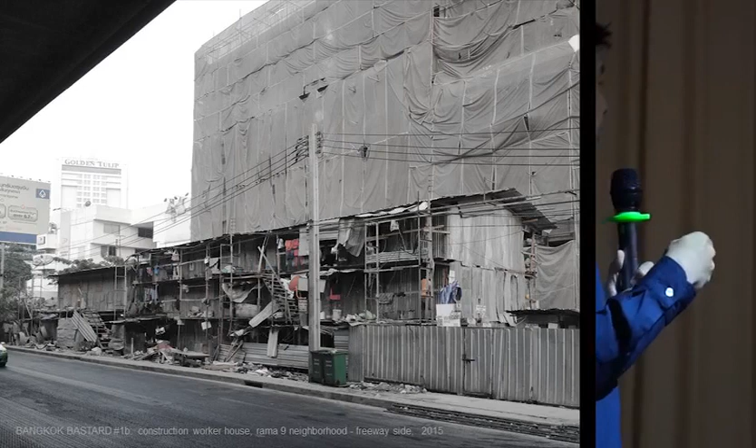I find this building type to be extremely inspiring in terms of the life that you see, the kind of authentic nature of these buildings and the way they're built. And as you know, they're built by the people who live inside the houses themselves, the construction workers. I feel like there are lessons to be learned with these very homegrown architectures that we can bring to our table to create a more authentic and locally sensitive architecture. Even though they're smelly, dirty, and messy, that's not the point. If we dig in deeper into them, you'll find there's so much more knowledge that's embedded within them.

So I started to give these Bangkok bastards, on top of photographing them, their due respect. I started to analyze them, measure them, document them.

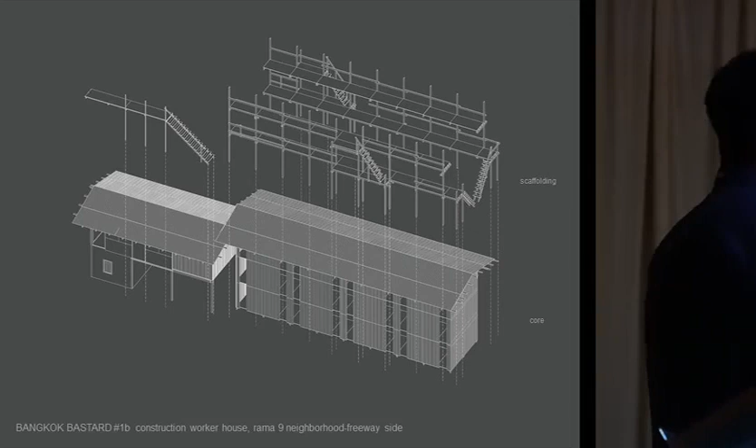For example, this construction worker house, if you break it down, just consists of a core unit—very small rooms that are tight, hot, and uncomfortable. But the fact that they're small and cramped forces the people who live in them to build scaffolding. There's usually a circulation framework that wraps around and becomes a veranda, shaded from sun and rain, that becomes a space for eating, drinking, playing cards, napping, fighting, arguing, doing laundry. It becomes a kind of scaffolding for life.

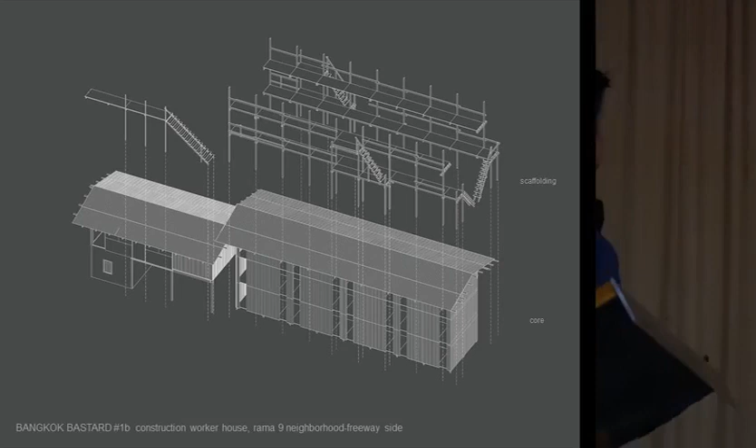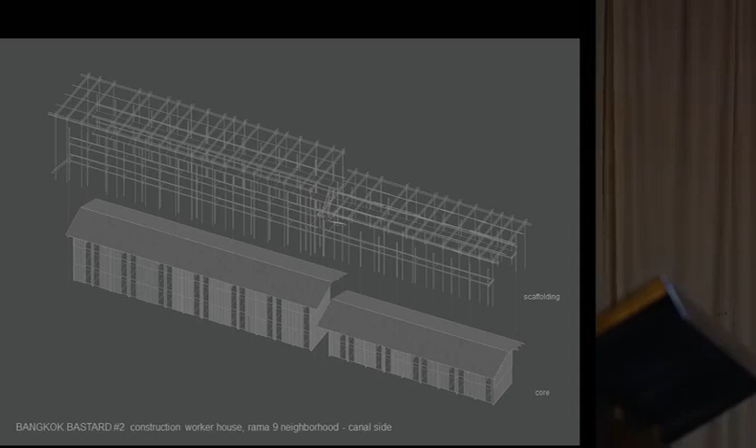Once you get to know this type of architecture better—this is another construction worker house on the same site as the first one, but this one faces the Klong, or canal, in the back. You can see the scaffolding has been transformed, not only as a veranda but also a canopy to protect the house from falling debris. So the workers have hybridized the scaffolding to become a protective helmet on top.

This beautiful one—when I went on site, the builder, the contractor, ran out and said, 'What are you doing? Are you photographing this? This is my baby. I'm gonna have it copyrighted, so please don't reproduce it,' because he was very proud of this one. And I think it's beautiful. I said, 'You should, because it's great.'

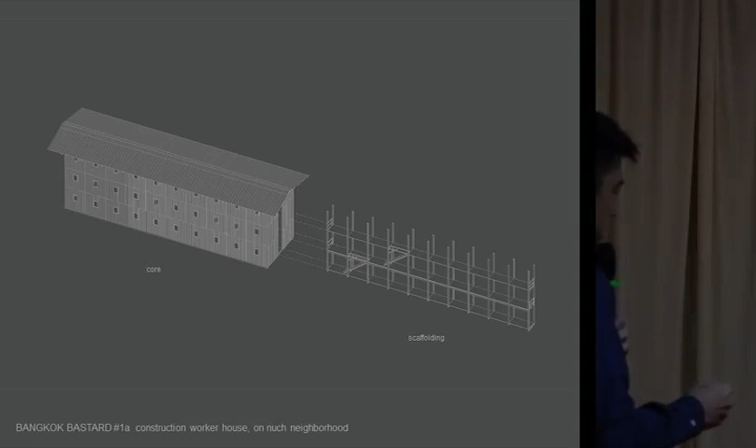But this one is different. This one has rooms on the outside, and the scaffolding is actually a double-loaded corridor. People come out and work in this kind of wind tunnel, and eat and cook and all that in this particular space. So you see how the scaffolding gets manipulated and changed.

So this modular unit can become multiplied and becomes housing units. You really redefine what a wall is and what a door is, so you kind of unbutton your door to go inside.

And because the workers and a lot of local Thai people don't have furniture, they sit on the floor—you can just peel up the window and let the light come in. So these are the lessons that I learned from these beautiful bastards, which I call them.

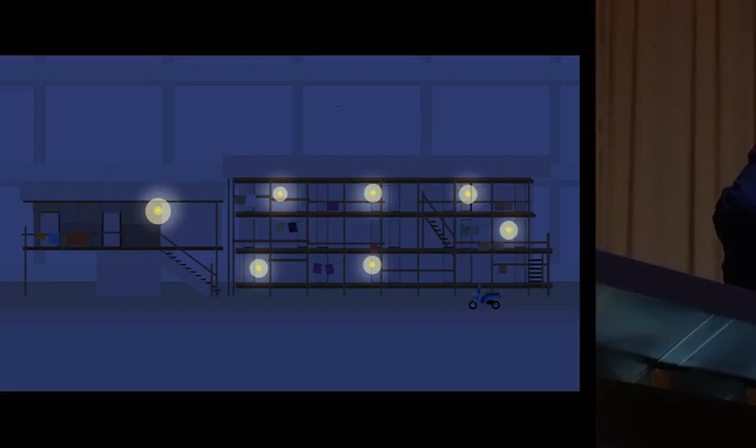And because I talk to a lot of students and young people, there's an epidemic right now, and I think it's brought on by modern architecture that really comes from the West—that you have to do a spectacular elevation, you have to do spectacular forms. And I think that comes about because we're always taught to look at architecture as a two-dimensional image. We forget to think about life and time scale, how a really simple structure can actually look mundane and regular on paper, but can actually accommodate life.

So I had to think of a new way to represent architecture that would show that. I did an animation with a local Thai funk band providing the music. So I'll let you see for yourself. Go ahead—this is 24 hours in the day of a construction worker house.

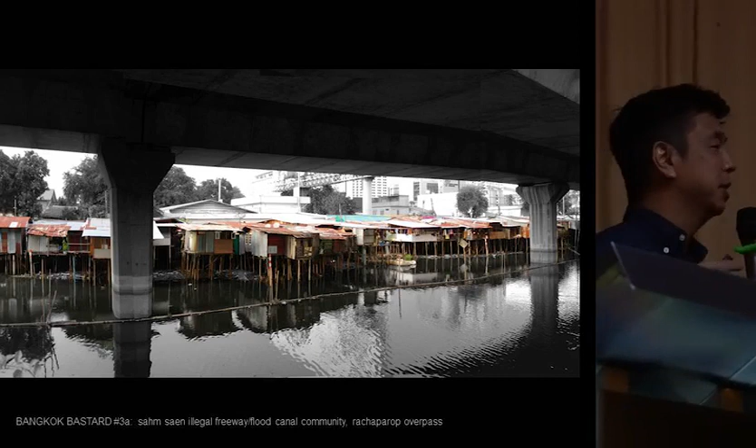So this next project is called the Sahm Saen Flood Canal Community. It's actually a semi-legal shanty town that's built on top of a flood canal, but also topped by a freeway. So it's this community that's tucked within infrastructure in Bangkok.

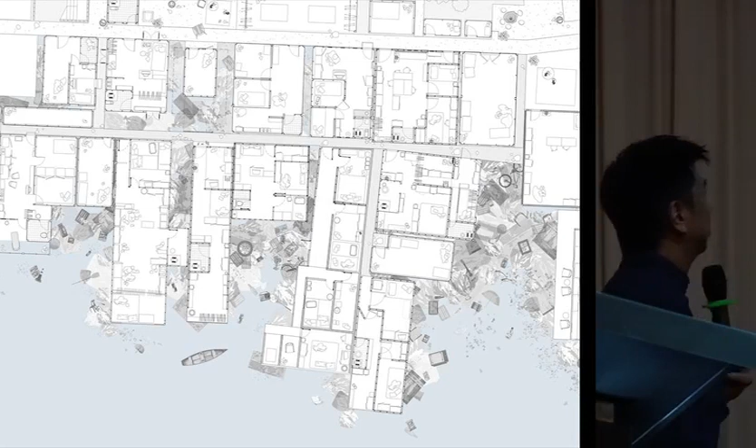So on top of diagramming them, this time we actually went in and really wanted to study in detail the architecture. Sorry, there's an image that's not showing. That's okay. Yes, okay.

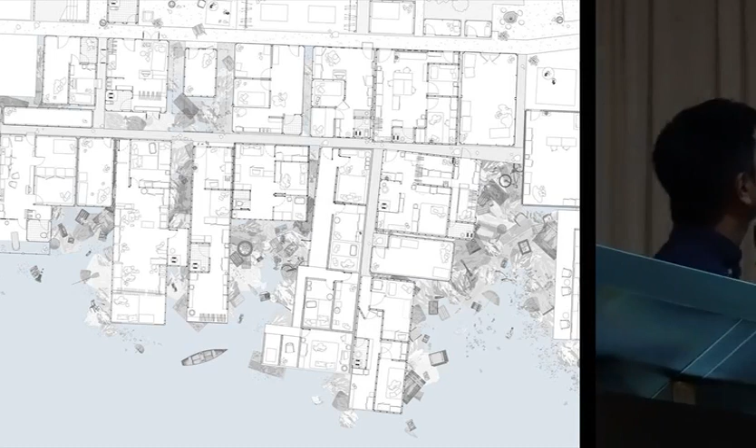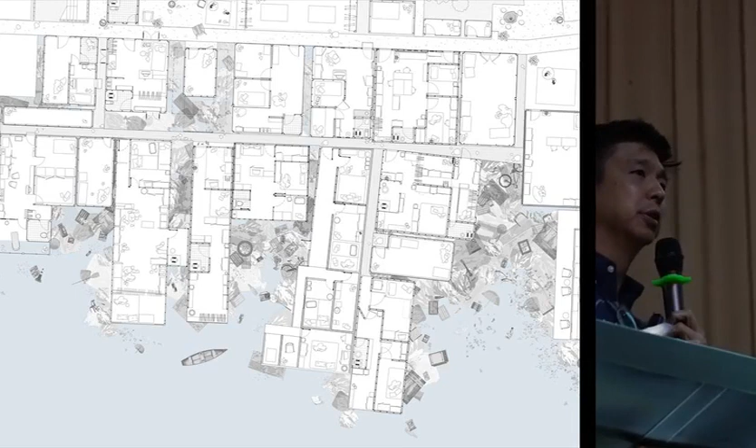So our team, consisting of both architects as well as student interns, go in and measure not only the walls and the doors and the windows, but also the pillows, the benches, the potted plants, even the garbage in the water, which I feel are all these little components, especially in Southeast Asia, that craft space. It isn't just walls, it isn't just architectural components that we learn in school, but all these minor elements make an impact on creating space.

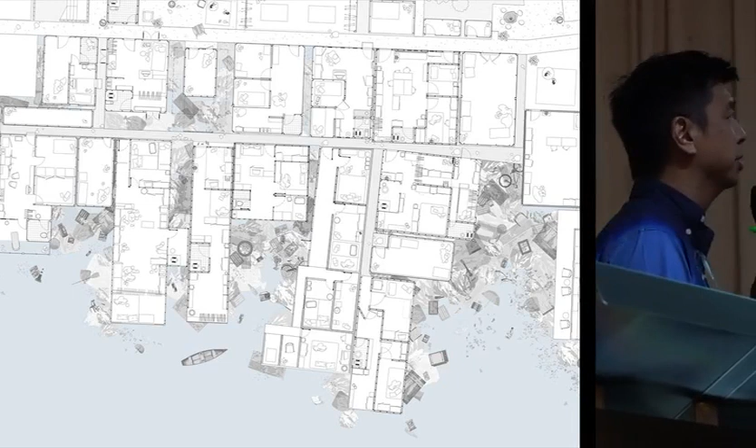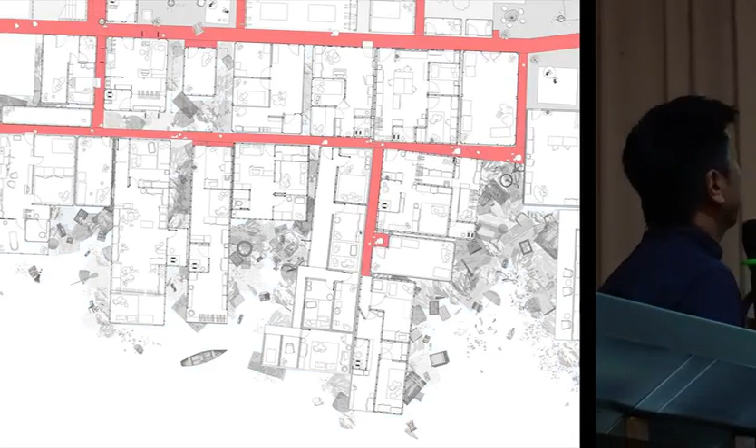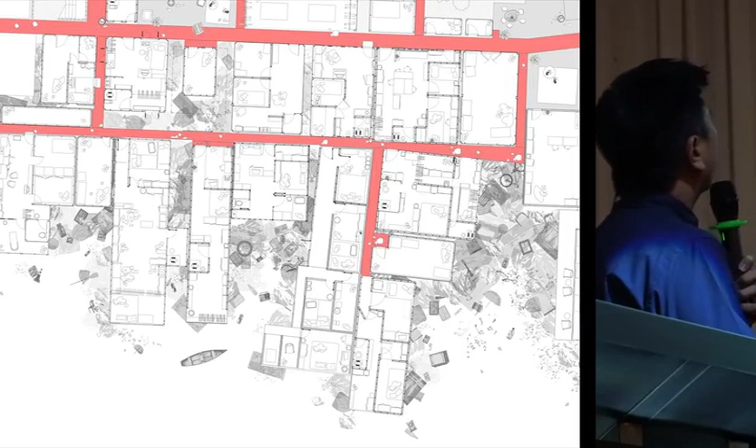And I needed to draw in a way that conveyed that as well, and to teach myself. And the deeper you get into it, you start to realize the organic growth and urbanism that happens. For example, these small little alleyways that are circulation spaces become outdoor living rooms. Similar to the construction worker house, where the small cramped rooms are very hot, so they're forced to come out and live on the paths, on the construction, on the circulation paths and the pathways, and they become public spaces where people meet and talk and eat.

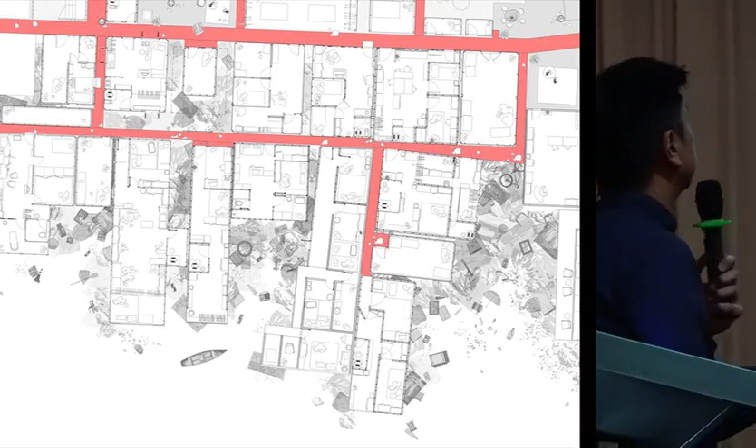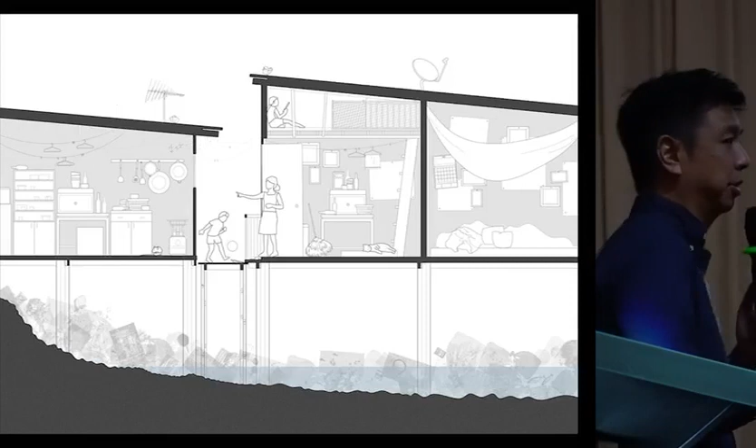Pots and pans and butane containers, cats, hangers, garbage, they're all architecture. They tell a story. So this little space is very significant in this community, right? And photographing it helps me understand it, but drawing it, measuring it, and talking to people makes me understand it much more in a way that I can use it in design in a meaningful way, where it's not superficial.

That's why I think research is very important for us to really look all around us and really record and analyze the things that are around us, rather than going on the website and looking at spectacular buildings on Dezeen or Architizer. There's so much inspiration all around you.

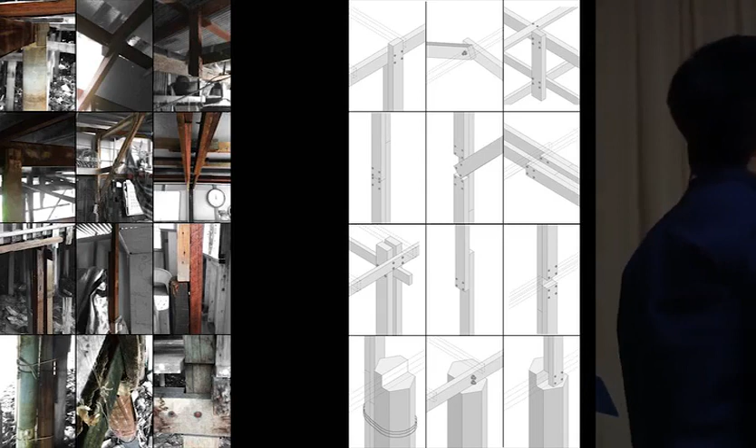To the point where we look at the tectonics and the construction techniques of these shanty towns as well, to see how leftover wood and lumber and steel members, even old telephone poles, can be hacked and transformed into new tectonics. This one that the shantytown uses, I call face joints, where it's the opposite of Japanese joinery, where you make mortise and tenon very carefully fitted to one another.

They're slapped, the faces are slapped on top of each other, and they just nail them in, because in another 3 months they may have to reconstruct everything or pull everything apart because the cops may come or the floods may come. So it's a very immediate, temporal type of architecture that I think we can learn from.

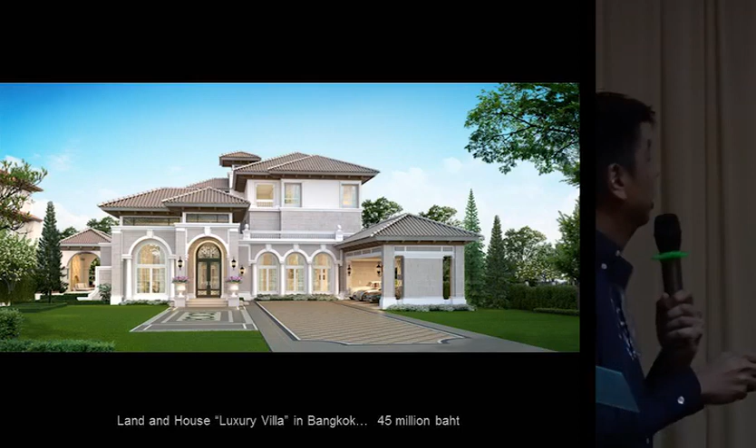And so I wanted to make a contrast between what I saw in the life that is conveyed in structures like this compared to what the dream is for a middle-income person in Thailand or Southeast Asia right now. The sign of success is to buy a typical developer home with a detached home with your surrounding garden, right? So this has been the dream, and it's been very much influenced by the West.

By doing the detached home, bringing it across the ocean into our country, because we have, in Thailand at least, a lack of zoning, where this house could be next to a busy street, we have to erect this 2 to 3 meter high concrete block wall, blank, that kills street life. So one of my first projects, I tried to identify how we could create a new type of perimeter wall suburban house that actually brings life back to the street.

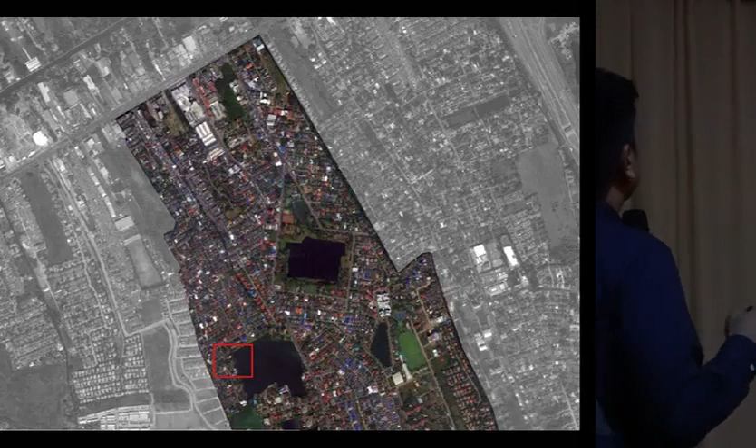So this is a project called Sala Arya. It's a yoga school slash house, private residence. And it's in this very funky neighborhood. It's quote unquote a gated community with a lot of detached dwellings.

But for some reason, as things in Thailand always happen, the law becomes ignored a little bit. So rather than all residential, little programs like wedding salons, convenience stores, spas, cafes, cuckoo clock shops, pubs and restaurants start to creep in. But in the end, it makes for a great mixed-use community.

And the client, a friend of mine, is a yoga instructor who lives in a rental home in the same community right now. Her house is a little bit too small to cram in all the yoga students, who are actually housewives or members of that community who walk to her house to learn yoga.

Another component is the client's mother, who has Parkinson's disease and is kind of confined to a wheelchair. But the great story is that whenever there's a yoga studio, mom comes, is ripped from her iPad watching Thai soap operas, and is willing to come and exercise with the class, so it always helps.

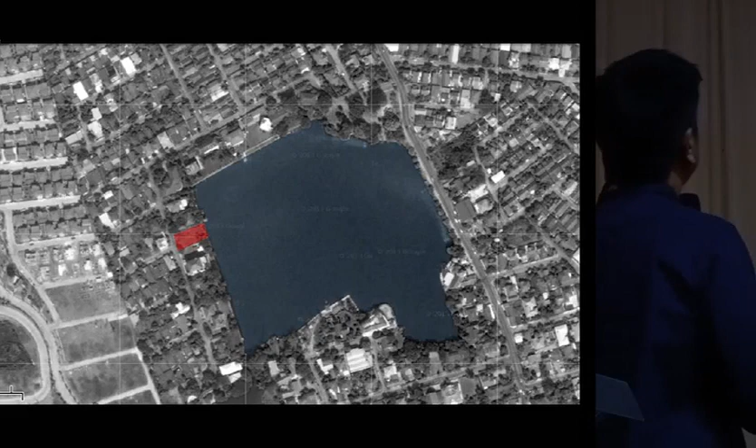So this house, the plot, is right next to this kind of flood reservoir. So it's an important connection between the street and the nature and the water. The house itself, or the house/school, is organized in a kind of unique way.

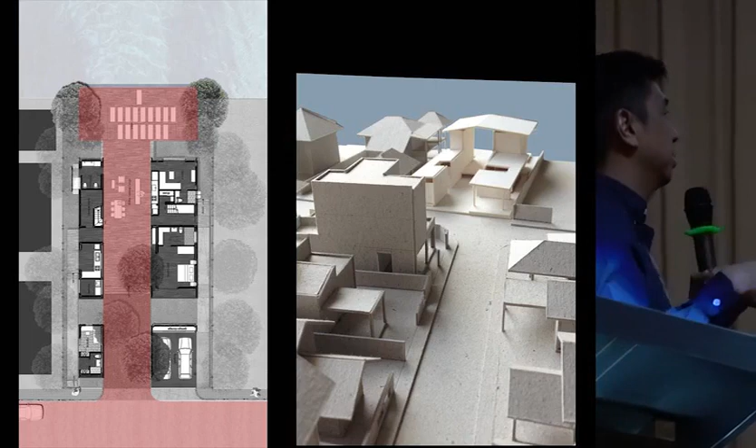It takes the lesson of the soi, or the path, as the main protagonist of the architecture. So the house itself isn't just the volume or the architecture itself. It's actually a small alley that pulls the community into the heart of the house and to the water. This space becomes kind of an informal open-air multi-purpose space, which you'll see.

I'll show you. So this is a model where these two volumes kind of define this gap in the house and lead you to the water. And at the end, these two volumes, their heads shoot up to become the master bedroom and the guest bedroom.

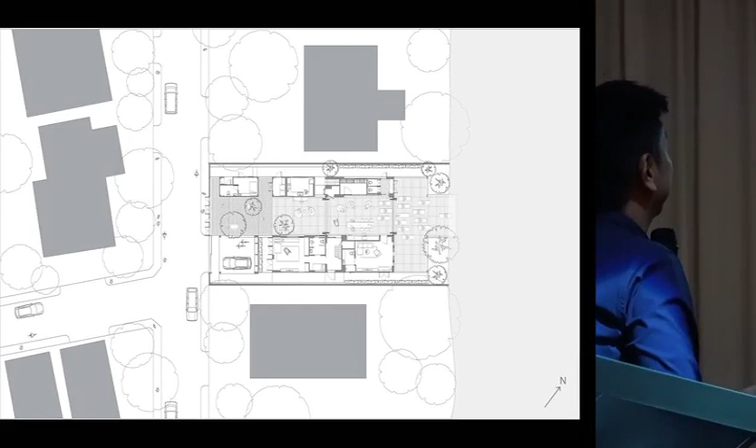So in plan, you can see how the house is actually, when the gates are thrown open, becomes an extension of the street and becomes an extension of the neighborhood, where the yoga students can come in and practice in this central space.

And in section, the central space is a void, and it's only covered by a large roof. Depending on the time of day, for example in the morning, when the sun is coming in from the water, the students practice yoga on this side of the court so that the roof throws a shadow onto the yoga area. In the afternoon, when the sun is coming from the front of the house, the yoga students move to the water so that the roof blocks the sun. And during the rain, they can just move indoors where it's covered.

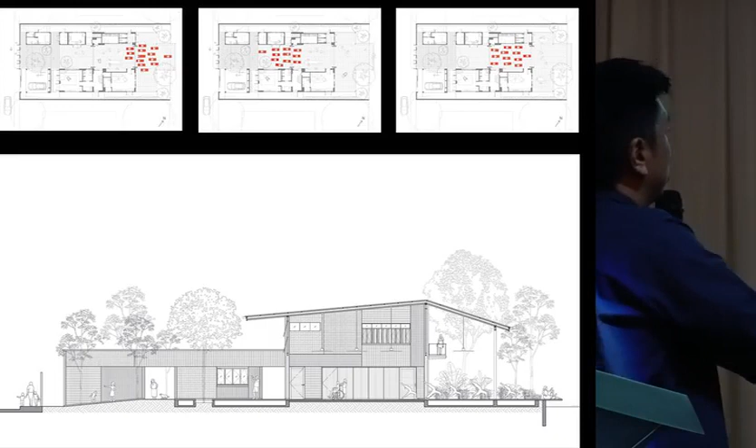The material is very important, and I'll go into it briefly later. I call it a bastard tile brick material that we invented for this project, that becomes a lining on the street wall and then pulls you in into the house as a lining.

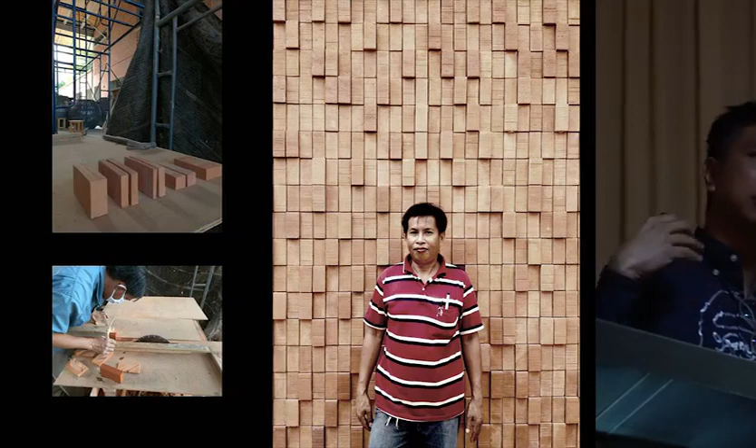And I think it's important. You may not understand it, but I feel like expressing it is important, so that there's an inherent, sometimes hidden DNA in architecture that can carry your memory of the place, even though sometimes it's hybrid.

Oh, and also, I have to tell you about another funny story. In Thailand, we always have to deal with catastrophes that are not expected during construction. I'm sure that happens here. There's always unexpected things that happen.

For example, these bricks, these local simple bricks that we ordered, were supposed to be about 12 centimeters long. And when we paid the deposit and half of the shipment came to our house, they wound up to be about 9.5 centimeters long. And I asked the brick supplier, what happened with the bricks? And he said, oh, a little bit of shrinking. I said, shrinking? How can a brick shrink 3 centimeters? And that was the end of that.

We already paid our deposit, so we're left with the dilemma of these smaller bricks. When you have smaller bricks, you can't cover the whole wall if they're shorter by 25%. It means we were missing bricks with the money we already paid. And so I said, oh my gosh, I don't want to go over budget.

What do we do? I always work with the craftsman and the contractor, and this is our craftsman, Chang Nu. Chang Nu said, oh, Khun Chat, don't worry, I have a solution. I'm gonna chop your brick in half. You see, I chop it like an iPhone right here, then I chop it like a popsicle here, okay?

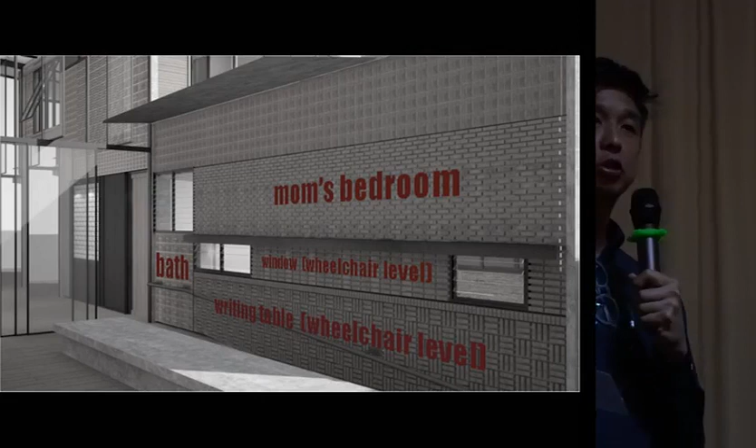In doing that, it allows us to create a new language, right? We're able to create these patterns that are completely two-dimensional and superficial, not load-bearing. So I feel like it's very Thai, because Thais are very superficial in the most positive way.

And with the superficiality, it doesn't mean that it's not meaningful. Each pattern conveys parts of the interiors truthfully. For example, this is a mom's bedroom, so this pattern conveys the writing table at the wheelchair level. This is the bathroom. This is the window zone, right? So these patterns, the mistakes that we had to solve, create a new language so that we could create a new local Thai bastard architecture.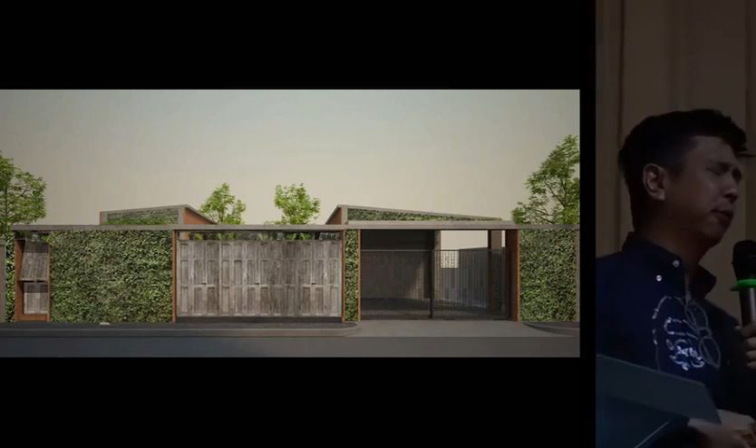So that was the wall we just saw. And again, the interface with the street is very important - how the perimeter wall house doesn't block itself from the street all the time.

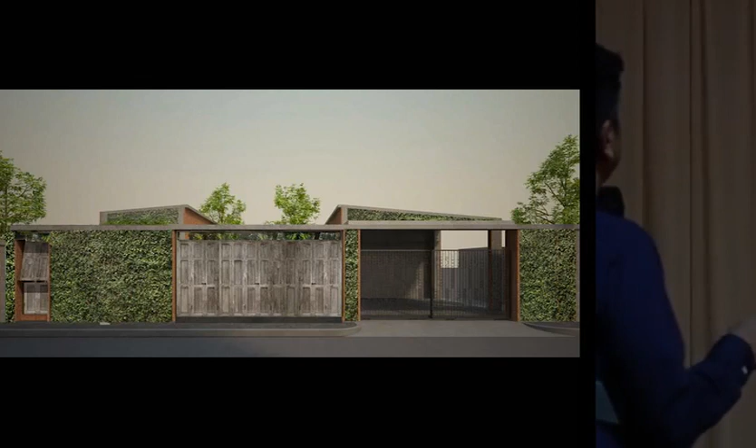This is a computer rendering. We bought these old doors, salvaged them from an old Thai house in Chiang Mai, northern Thailand, and it can be thrown open so that the house opens up to the community. This was taken just last month.

Our builders went further because we had leftover tile bricks. Remember the popsicle sticks? He chopped them again into quarters, almost like ice cubes, and said, 'Oh, this is my ice cube wall for you.' It's beautiful. Then he recombined some other bricks and said, 'Oh, I want to make a new type of CMU.' I said, 'What?' So the bricks he had, he remortared them into blocks and stacked them in a new way.

I feel like invention doesn't have to come at the studio desk - it could happen on site. And so for me, this little alley and our own alley aren't so different from one another, right? So this is where research starts to inform design and vice versa.

I'll go through this very quickly. Am I doing okay on time? Yeah, okay. So I'm gonna do a quick pass at a hotel we finished about 7 years ago to introduce you to another hotel.

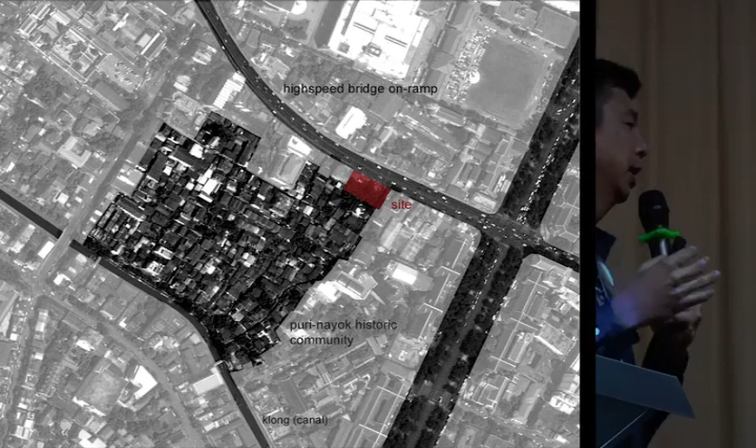This is the Nanda Heritage Hotel, a 3-star hotel that the client asked us to do as a boutique hotel at that time. I shot back and said, I don't know what a boutique hotel is - people use that word all the time. But what I do know is that a good hotel makes you feel the spirit of the place. It brings out the local character of that place.

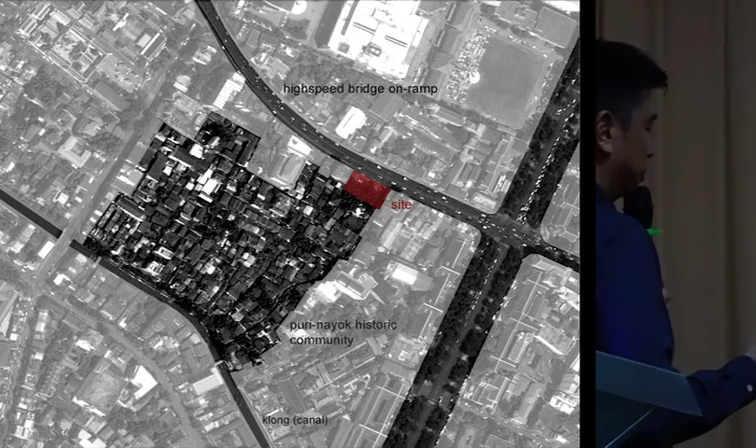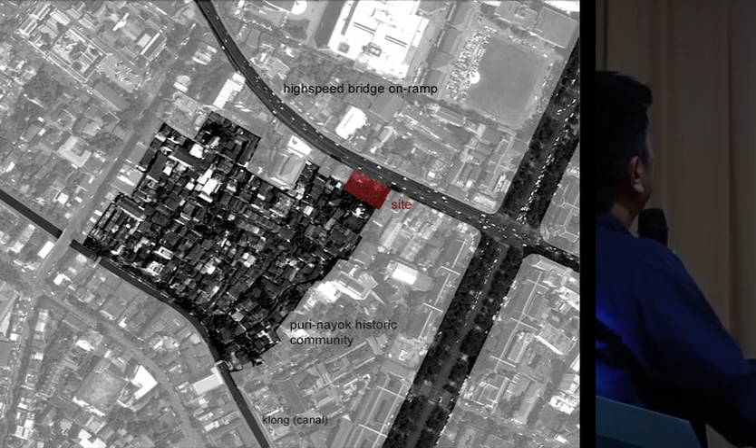This site is really interesting because it's at the connection between the new city and the old city. The site is like a knuckle between this very high-speed, almost freeway-like street that leads to a bridge across the river. But in the back, it's a 100-year-old shanty town - shanty towns that most Thais don't walk into because they think they're slums, but there's very much beauty in there.

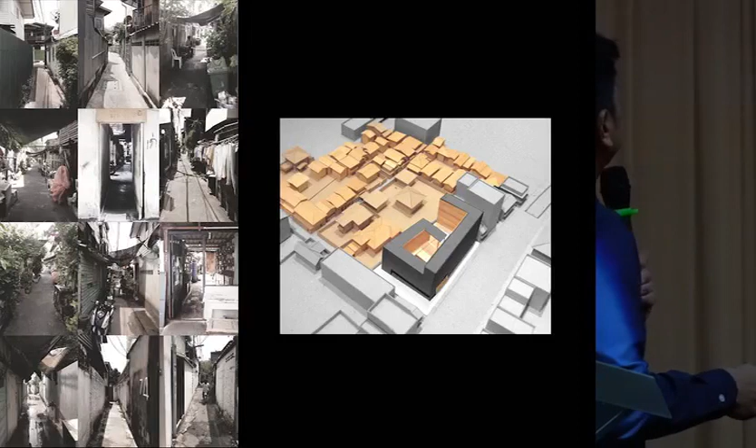So we built this model. We never built a model of the project itself - we always built the context. So we built the shanty town in back, and this is the street in front.

The shanty town, again, is full of these wonderful paths, almost like a labyrinth. You see that they use scavenged materials, old tarp, old siding, to create public spaces in the in-between spaces. As you can see in this model, we built the shanty town in wood, but also lined the courtyard of the building in wood. So the building itself is actually a shell where the living units protect this inner secret court that you access through a tunnel.

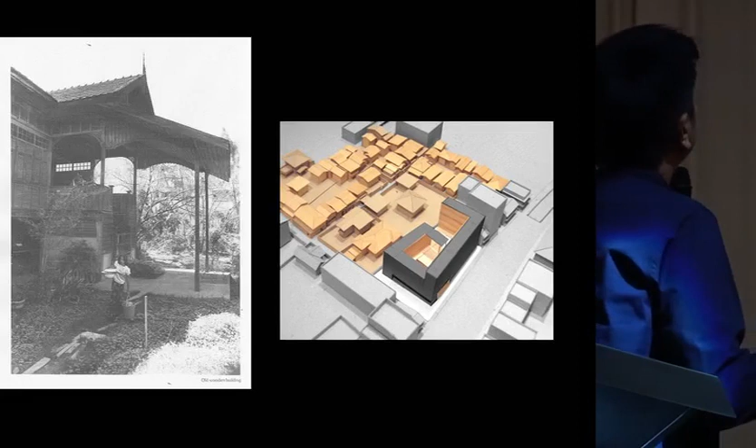Having learned the lessons from the locals, we try to reuse everything and create a sense of memory. During design development, the owner came to us and said, 'Chat, we have this old house that I grew up in - it's my childhood home.' It's a beautiful, 95-year-old teak wood house in Bangkok. He said he was going to sell this to get money to put into the hotel, and I said, no, don't sell it - let me have your house. Because I want to reuse it to tell the story of this hotel that's going to be called the Nanda Heritage Hotel, informing us of the heritage of the family.

So we went and surveyed the house, every single piece - ventilation panels, doors and windows, floorboards, railings, everything. We used everything and recombined it into a new core and inserted it into the courtyard.

So as you see here, the building is a bastard in that it does many things. The dark, simple concrete frame portion is 7 stories high in the front. It acts almost like a billboard with these speed lines inspired by the telephone wires, creating a big presence on the street so that when you're zooming down fast in a car, the building gets your attention.

But at the same time, the recycled wood is used to create a smaller building within the bigger building that operates at the pedestrian scale.

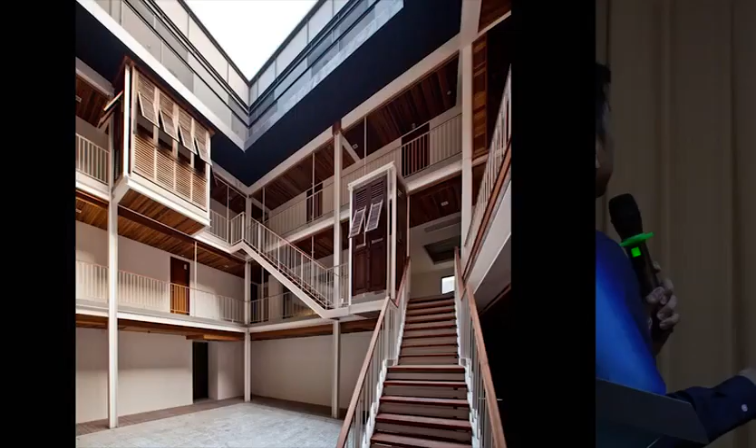So as you go through, you can see all the wooden elements from the house are reframed as artifacts in these slim steel panels, steel plate.

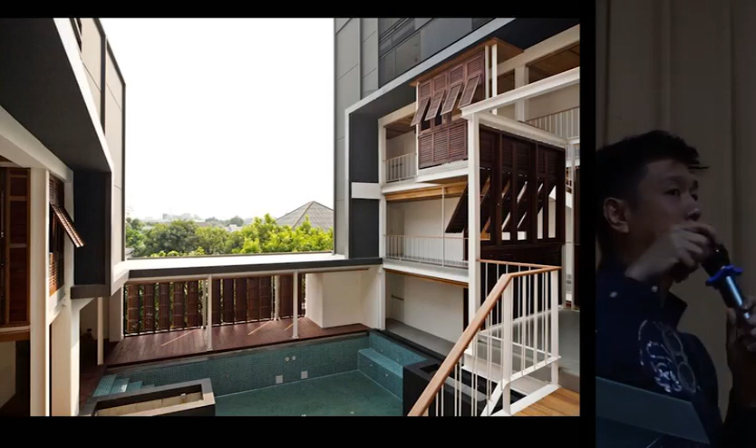And at a certain point in the courtyard, in the back as well, the building dips down to two levels, and I tried to frame the shantytown in back, as well as the neighbor's mango tree garden, so that even though you're inside the hotel courtyard, you're aware that you're part of the bigger picture, part of the shantytown.

And so we not only work on the programming of the hotel itself, how it can be a place for community. For example, almost every two weeks there's an event inside the courtyard of the hotel. This one was done in 2017, where a lot of Thai friends, designers, would get together and show projects to each other.

Of failed and canceled projects where the customers cheated us. Just kidding. No, which is about 90% of all our work.

But the interesting thing is, while we were doing this slideshow, the guests would pull up a chair on the balconies and participate and look, so that the hotel isn't just about tourists, it's about where locals and tourists meet as a community.

So this project is usually longer, but I wanted to preface it to a new project that we're doing. While I was working on this project, which took a very long time because there were various political and natural disasters that happened at that time.

While I was visiting the job site, thinking I was pretty special in creating this building with a tunnel, a pinched opening to create the secret courtyard, I found not too far down the street another building with a tunnel. And then a little bit further down, another building with a tunnel. And then another building. And then I discovered what my next research was: the Curtain Sex Motel.

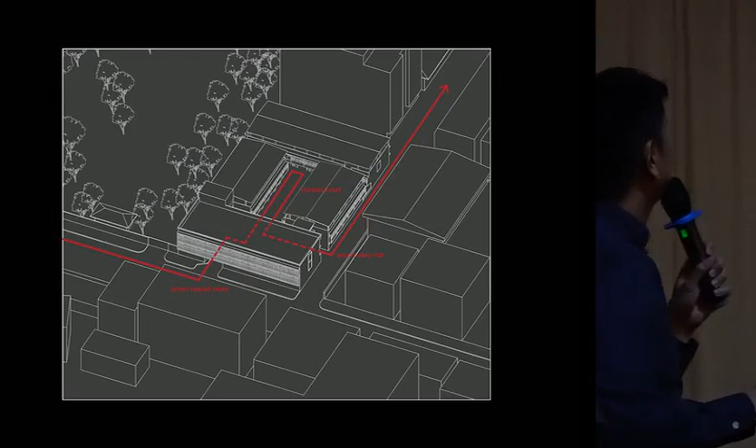And so I diagrammed it, right? So you go through here, you do your thing, and then you go out that way.

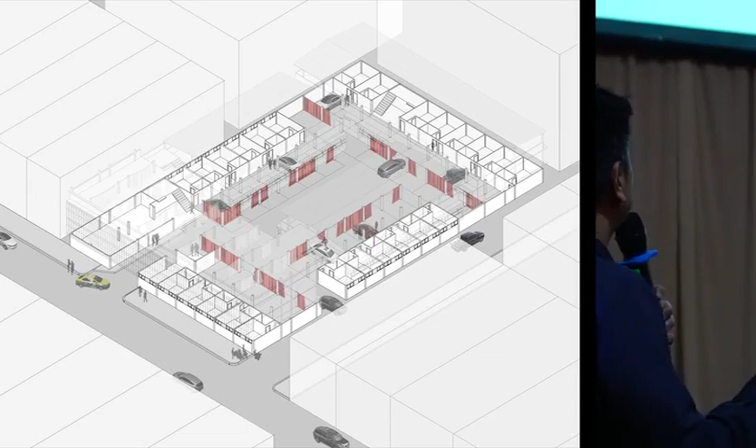And then we want to revisit it more, so these are drawings we just did for a magazine just last month, to really convey this space on the ground level where you go in and these red curtains really did shape and define space. And then we had fun with this section. You can zoom in on it on our website later. There are a lot of situations going on in there.

I did an animation, which is kind of X-rated, that we showed in China, and the police came and shut it down.

Do we have time to show it? I knew what the answer was anyway, I just asked to be polite. Okay, let's show it.

Wow. It tells a story of this pathetic man who tells his wife that he's going to exercise. He doesn't go in his car, he walks there, so he's a modern man.

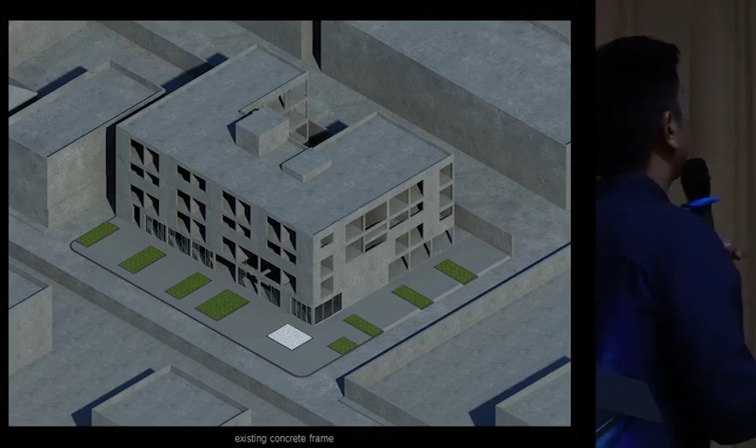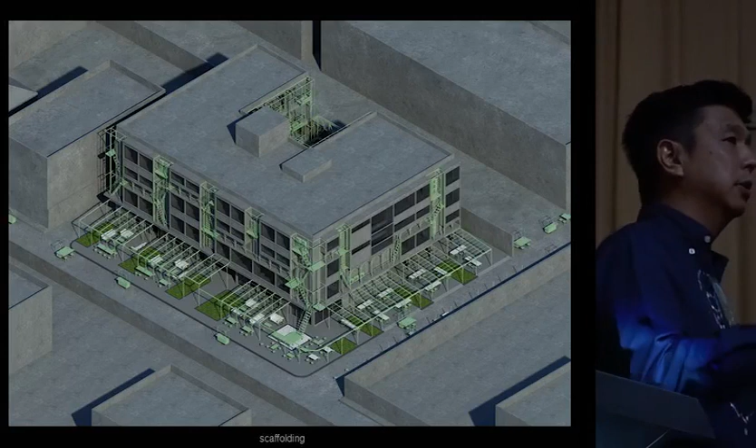So if this were the building stripped down to its bare structure, this new extrusion is the intervention. These are all the pop-out bays. Lessons I learned from looking at the vernacular of the area made me want to utilize the idea of scaffolding—basically turning a building that used to be private and turned in on itself, very mysterious, into something that opened up to the street and created value for the public.

So the scaffolding is divided into 3 components: a porch component, an alley component, and a theater component. I'll tell you what these mean.

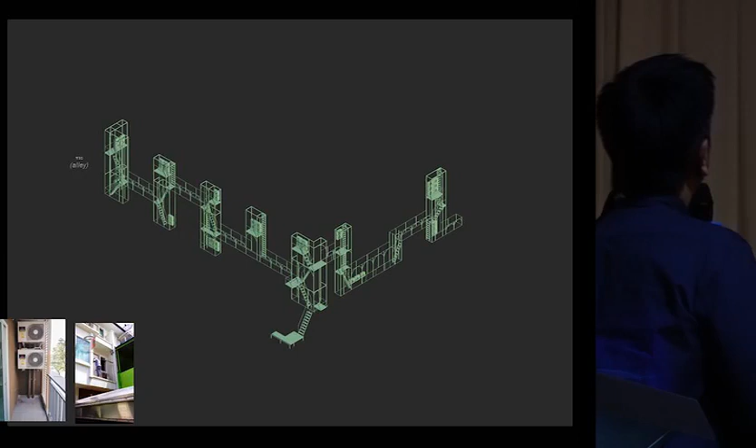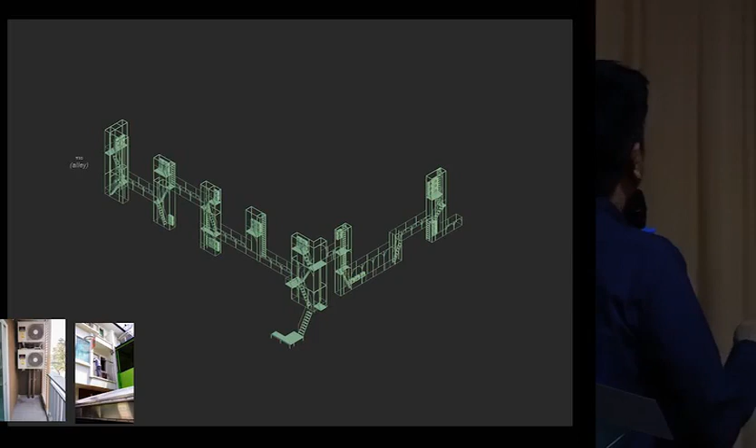So the alley component is actually kind of a vertical path in the facade that winds back and forth within these pop-outs. I basically want to solve a very basic problem. A lot of developers come to us and say, if we're going to do an apartment or condominium, please put in really nice, cute balconies because they make the buildings look great. I don't know if you've ever had requests like that.

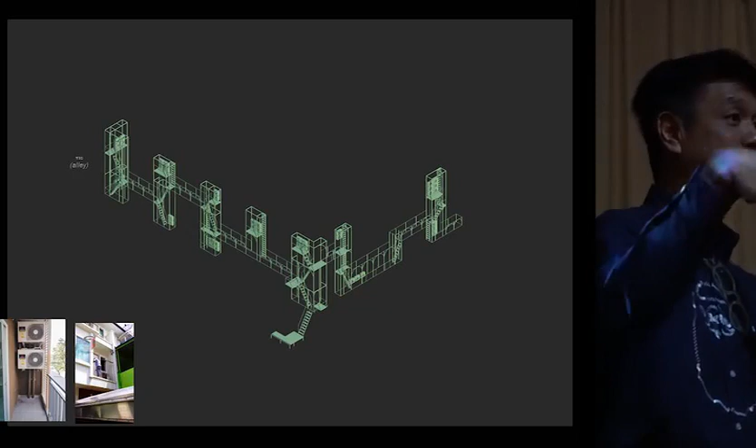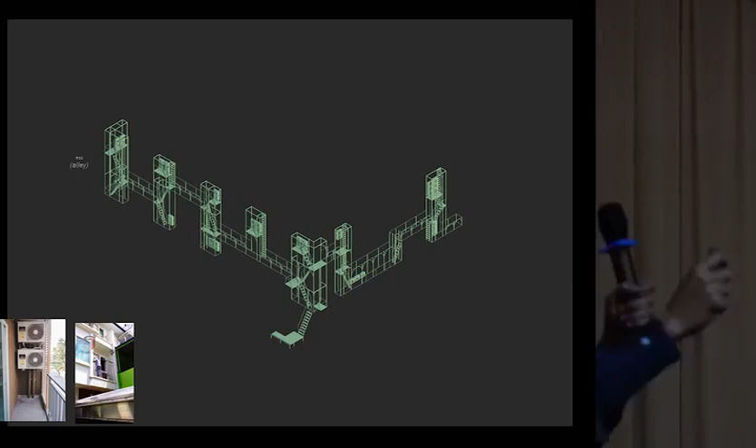But as you know, in a city, nobody ever uses a balcony. It becomes a place for air condensers, hanging laundry and other utilities. The problem is that if you have an issue with your air condenser unit, the repairman always has to go through your unit to repair it. So this path actually allows service repairmen to service all the condenser units and other MEP systems without going through the rooms. But it also has another public surprise function, which I'll show you later.

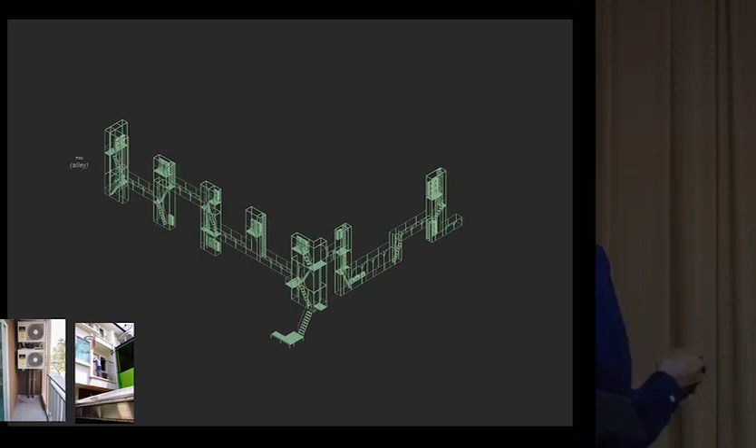The porch is actually kind of a veranda scaffolding. Again, this porch is related to Papa's affinity for street food, because he started off as a street vendor and has a soft spot for street food in Thailand, as I do as well.

This is actually a neighbor who's just on the alley that the hotel sits on, the sausage man and his armada of sausages. We work with him and other nearby vendors to create a business model where instead of guests coming down for the typical eggs and toast continental breakfast, why don't we send them out to eat Thai sausages, porridge, or other local food, and help each other in terms of the business model.

Which is the opposite of a lot of operators, where when they see street vendors like this they think it's dirty, it's unhygienic, why don't we get them out so we start with a clean slate. We think it's the opposite - we think we need to work with the neighborhood.

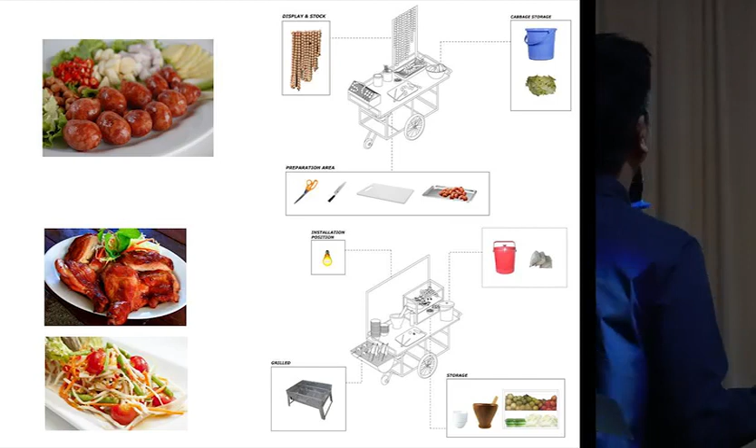So we start to do research on street food, which is great, and street food carts. Also, a couple of years ago, the military government wanted to adopt the model of Singapore and relocate all of the food carts into one centralized location, basically banning street food from Thailand. If you go to Bangkok right now, about 50% of the street food carts are gone, which is a sad situation. So this project is meant to show that there's an alternative to banning street food from the neighborhood.

The porch is basically a covered veranda, but it also involves all the mobile furniture that we've designed, as well as extra street carts that can be rolled out onto the alley to kind of take back the street.

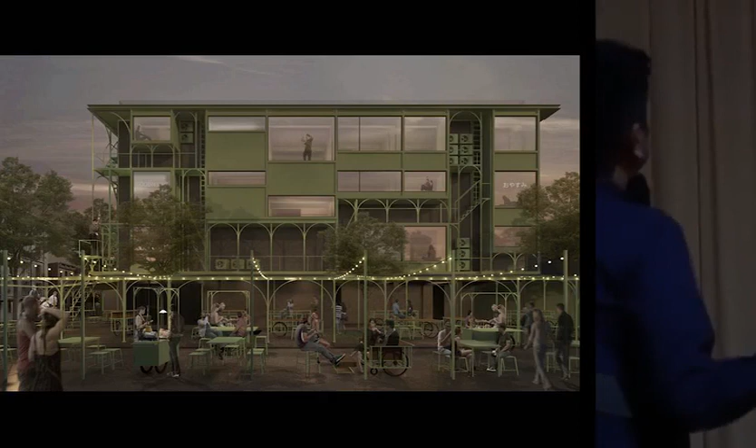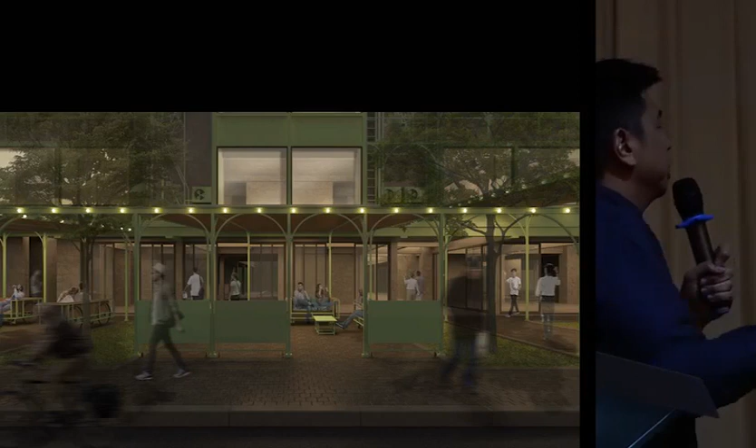At times, this particular alley is closed off to traffic after 7 p.m., so we can roll the furniture out and bring back life to the street. At certain times, the building has to be closed up after hotel hours so the perimeter is protected from wanderers and stray dogs, but at certain times when it's open, the perimeter flips down to become a table you can sit on at the sidewalk to activate the street life.

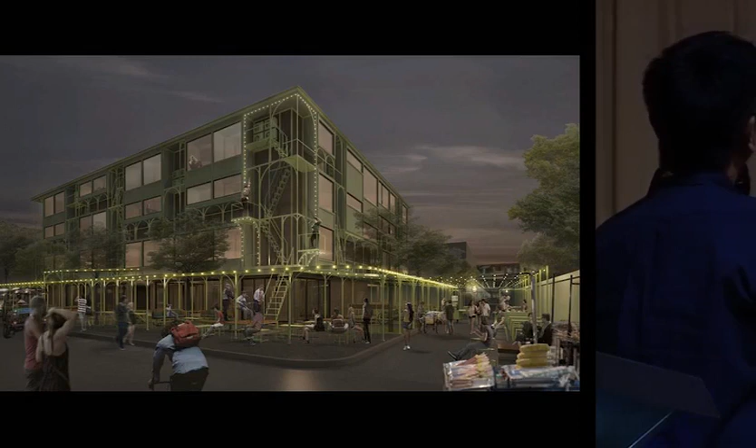And remember the alley that I told you about, the service condensers? At night, it becomes a vertical stage for street performers.

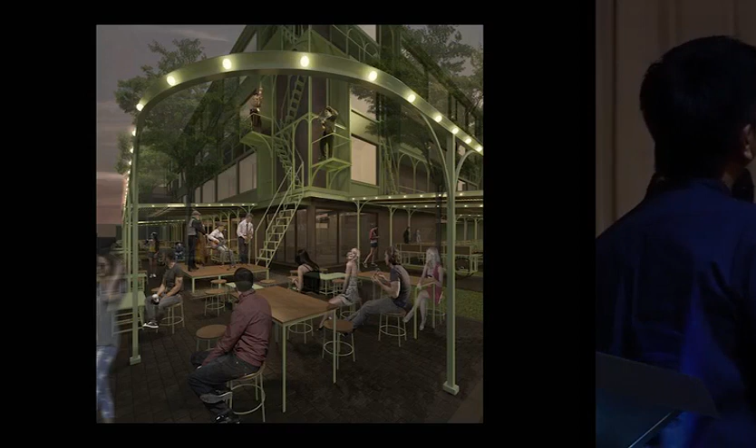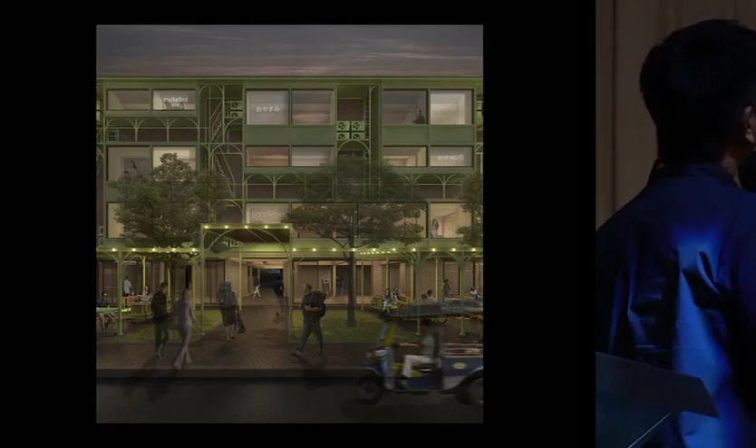Oh sorry, and then we still have the tunnel. So the front still has a tunnel that leads to the inner court, but before you get to the inner court, there's the lobby where all the furniture is designed in a mobile cart language.

And as you enter the courtyard, it has turned into a swimming pool, but it's more like a community room with benches on all sides. It's not a lap pool. At night, we show movies, because this harkens back to the rural Thai tradition of putting up canvas on temple grounds during festivals and watching outdoor movies.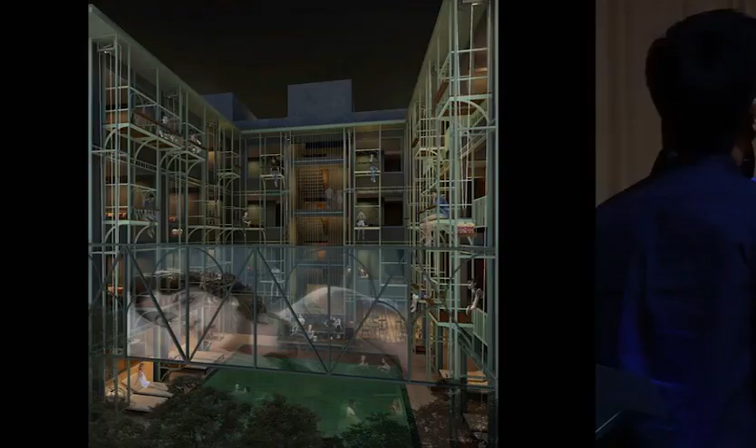Another important thing is we redesigned a new type of balcony where you can actually slip your legs through and dangle your legs so that your face is turned to watch the movie, but also towards each other. So it's a balcony that forces you to look at your neighbor, and it makes this into kind of a community room.

So this scaffolding inserts into the courtyard to create the outdoor theater. The last feature: there's a pulley system that brings popcorn up to your balcony while you watch a movie.

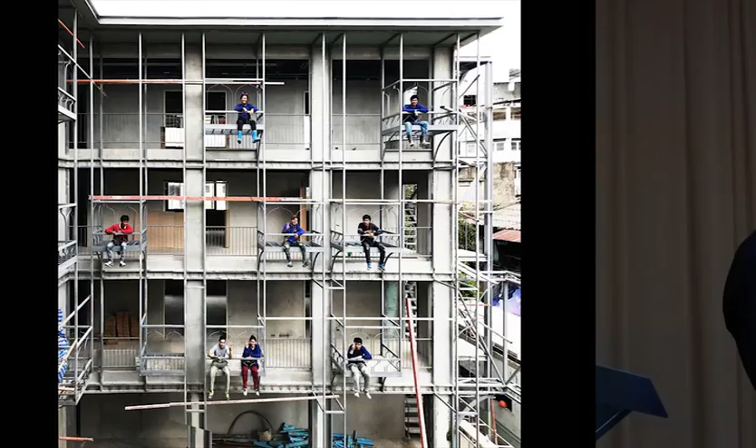So this scaffolding, this is during construction when the workers were hanging out, isn't so different from this scaffolding, I think. A feature of the past. They're one and the same.

So here's some actual construction shots. These were taken last month. So this will be open in May. Please come.

Last one. This is a project I haven't shown before because it just opened, so it's the first time I've shown it to the public. It's one of our first projects outside of Bangkok, called A Bastard in the Mountains.

It's in this resort near a national park called Khao Yai, or Big Mountain. An unusual phenomenon has happened in the area outside of Khao Yai, which I think happens in a lot of developing countries in terms of resort architecture. It's turned into Europe. So we have a resort called Thames Valley, which is a kind of a British reproduction. We have Palio, which is kind of a Tuscany hill town. We even have our own Leaning Tower of Pisa in Toscana Valley, a Singaporean development nearby with air conditioners on the back. So this is the situation of Khao Yai, or Big Mountain resort town, that we're faced with right now.

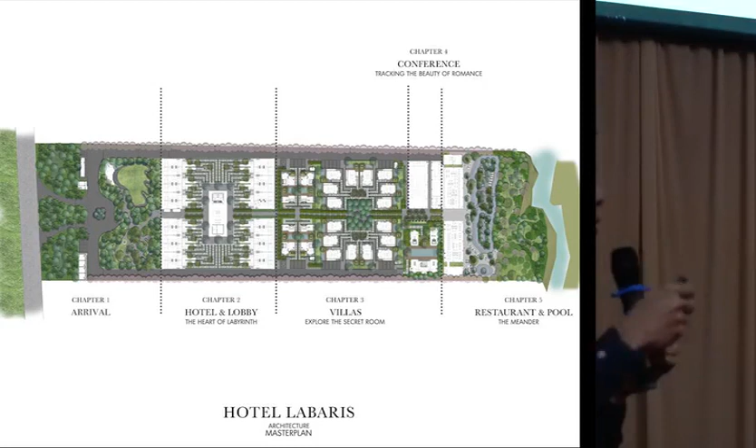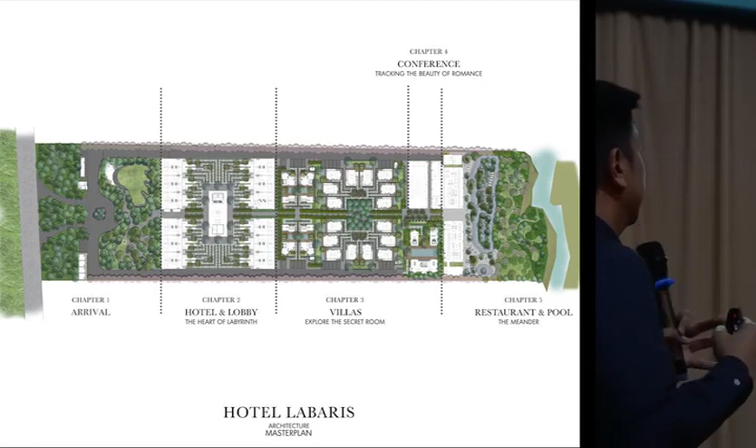So we imagine Hotel Labaris — the name came from labyrinth — as kind of a kingdom from these magical Khao Yai mountains, where the animals ruled. It's divided into chapters. These are the animals, derived from real wildlife in Big Mountain, meant to teach the kids about wildlife.

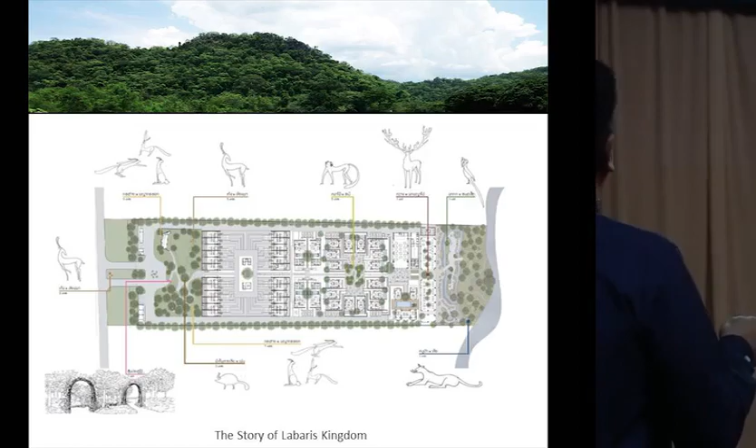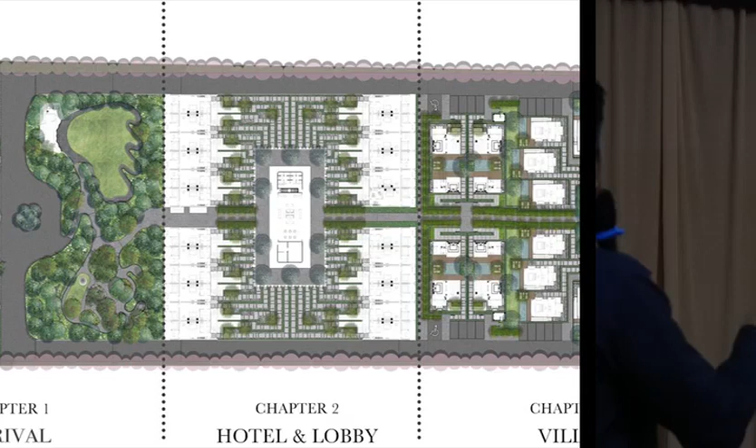And the heart of the project is the hotel element itself, where we tried to transform and bastardize how a labyrinth could become a new type of hotel in the mountains. So what happens is, I'll show you, you walk through. Having multiple narratives in architecture is important. We can talk about how this is a storybook setting — like I told her, it's a castle with a void in the middle, like a courtyard for the priests and the monks. But in reality, these are shop house modules, 5-meter concrete frame structures. So they're very cheap.

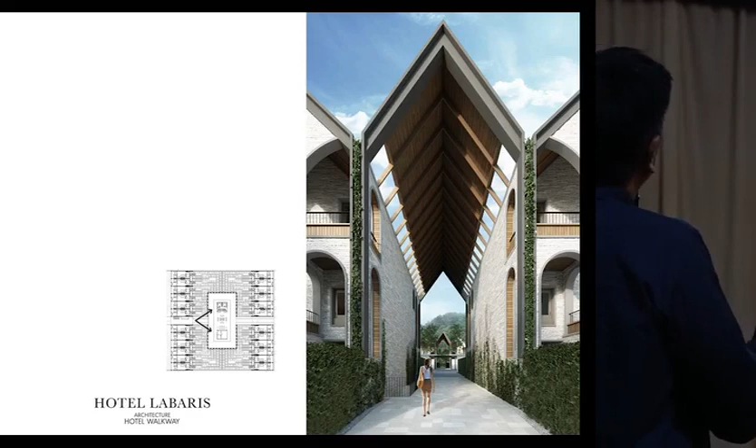So what you do is you go through this void in the middle to penetrate the wall, and then you enter the open air lobby in the middle of the courtyard.

At the lobby, you're confronted with a horde of drawers, these mysterious doors. You have your own drawer, which contains your own map and key and a welcoming kit, your magical horns.

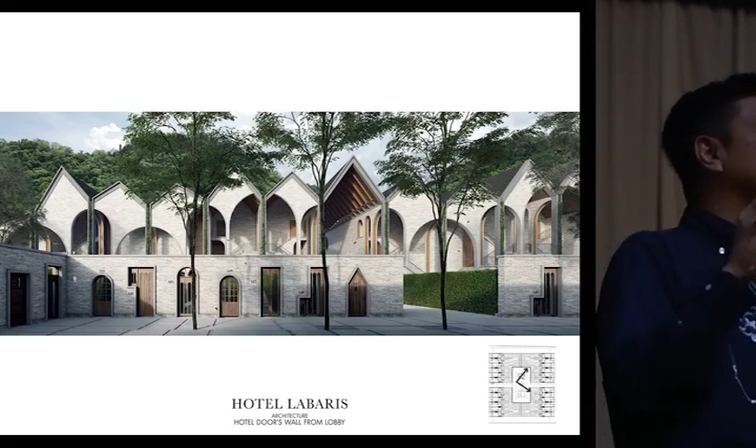And then with the key, you go to the outer perimeter wall. There's this exterior wall that has 48 different doors, each one leading to a different hotel room. You walk through each door, and you can either go through here to there, or here to there. It's a combination of a labyrinth plus a hotel room, trying to create a new type of experience in the mountains.

So if this were their diagram, where these are all the alleyways to different doors, what happens is we're able to create a new type of resort where this snake-like garden becomes the first part of the hotel room.

Once you enter this door here, it's the beginning of your room experience. So you have your own secret garden that leads to your room. We kind of blew up each unit. Each room has a new forecourt that's a garden that leads up to the room.

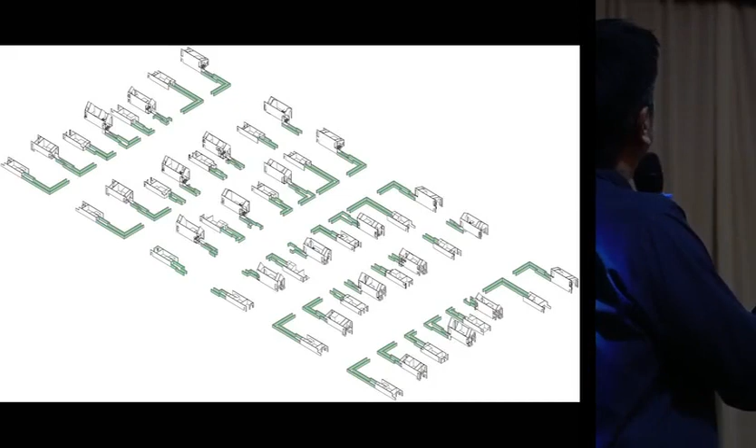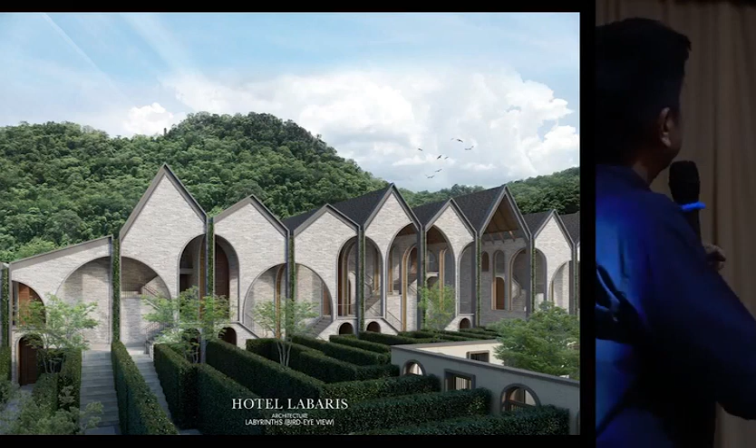And in doing so, you can have breakfast here. Because you come in through your door here, this is where the security is. Then you can have a little bench here or breakfast set up, and then you go into your room. So it extends your idea of the resort room.

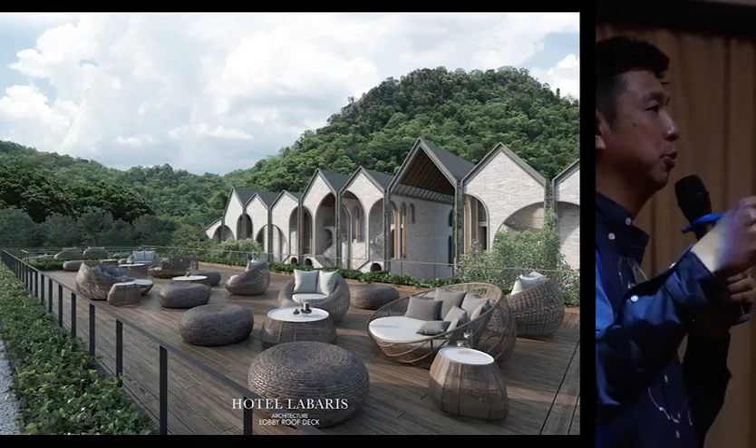And then when you look back, the roof of the lobby itself becomes a roof deck where at 4 p.m. we have live string music, like music in the park. Again, the architecture is actually a tool to frame the mountains.

Let's talk about when we first saw these doors, we designed them out of our heads. But with me, every project has to be flexible. I'm never tied to any form at all, because I feel like picking up parts of culture and architecture and the past and integrating them during the design and construction process is important.

So while we were constructing these walls, we went and found 48 different salvaged doors from Thai homes. They're very much historically linked. So when we put them into this new setting, it creates a layer of memory that's both global and local.